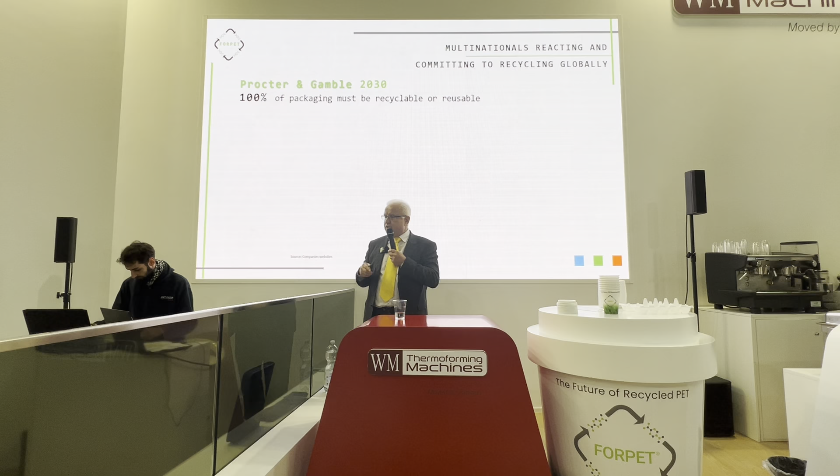This is something we have been really working out, and we have also been trying to follow up on the announcements of the brand owners. If you look at brand owners like Procter & Gamble, they are announcing that by 2030, 100% of their packaging must be recyclable or reusable.

If you look at Starbucks, by 2030, 50% reduced waste sent to landfills, driven by a broader shift toward a circular economy. Pepsi, by 2025, 100% of packaging must be recyclable or biodegradable. Nestle, by 2025, 100% of packaging must be recyclable or reusable.

And finally, McDonald's, by 2025, 100% of McDonald's packaging will come from renewable, recycled, or certified sources.

So this is nothing we have been developing - you can find those announcements on the internet, and this shows that the big brand owners are following a circular stream. We at FORPET would like to give them a chance to fulfill their own commitments. And how we should do this, I would like to present now.

As the name says, FORPET, we're dealing with PET. Why PET? Because PET meets all characteristics of a circular economy. PET is 100% recyclable. It could be recycled many times without any problem. 100% recycling usage is possible.

If you look at the water bottles, I don't know whether this particular one is 100% recycled, but this kind of bottle already exists using 100% recycled PET. So that means PET is already, in certain packagings, in a fully circular stream.

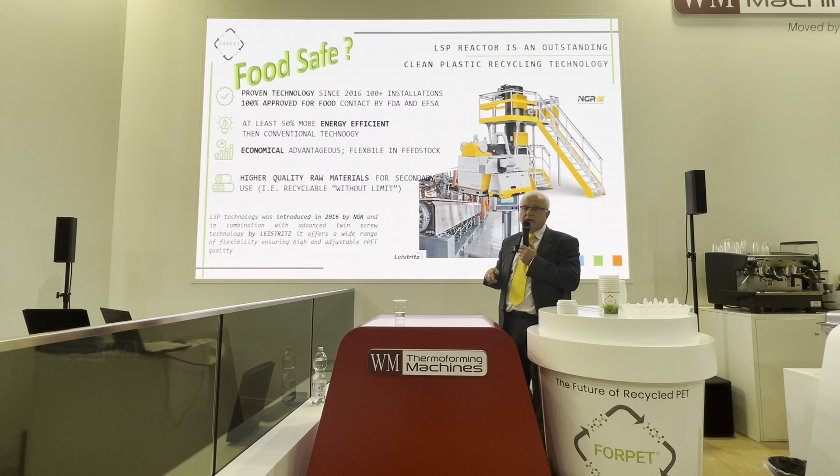At least with this combination, when we are running twin screw extruders with the liquid state polycondensation, we are getting even 50% energy saving. And in times like this, I think everybody is really worrying about energy; energy saving is really a critical point. And this keeps the OPEX in a lower part.

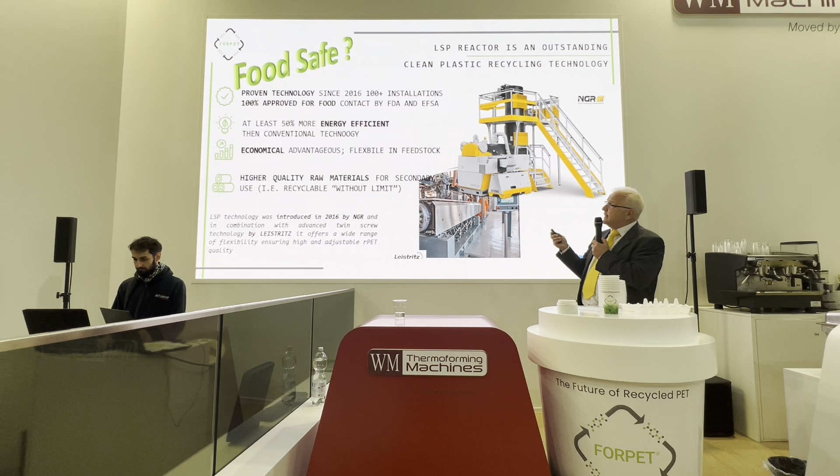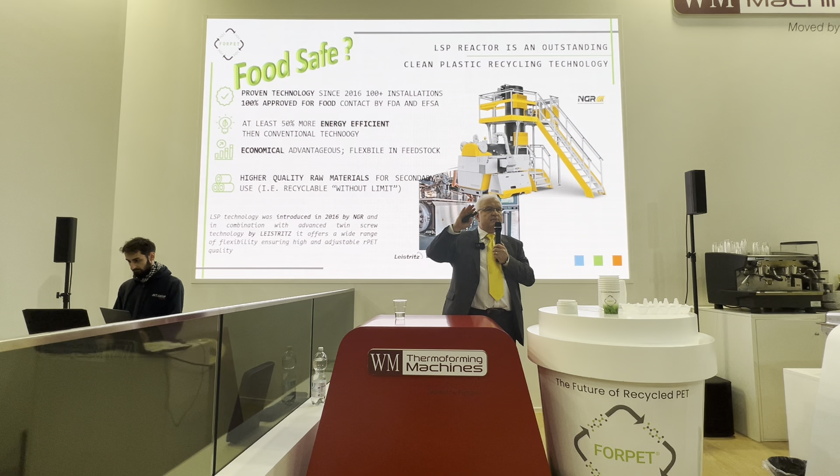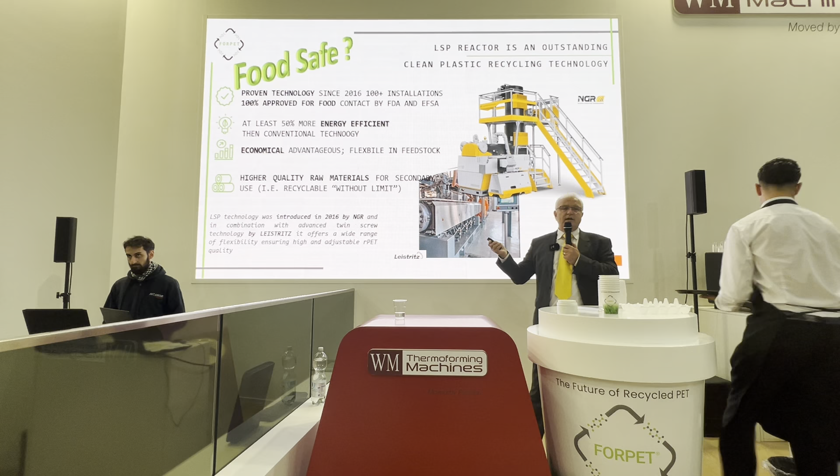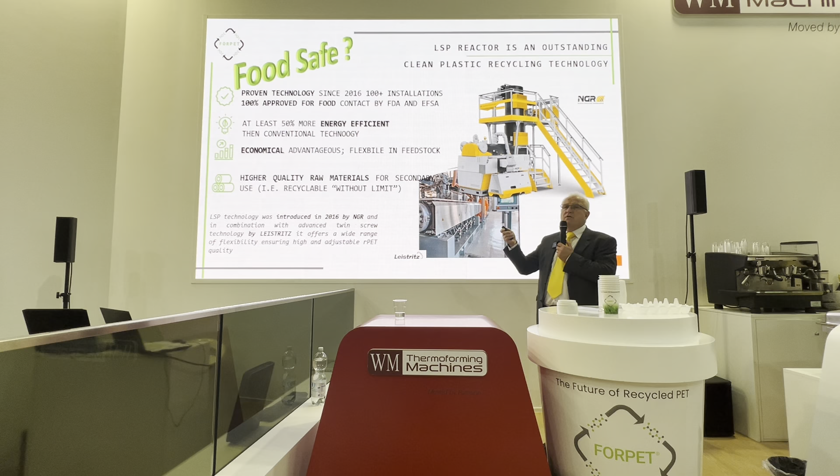And then, of course, with the right extrusion technology, with the right liquid state polycondensation, it gives us the possibility to look for certain feedstocks. So we are not only looking for a very qualified feedstock, because we can handle a wider variety of feedstock with that equipment. And so, without any problem, with a raw material source which could really give you an opportunity, we're able to produce raw materials for second use, especially for second use in packaging.

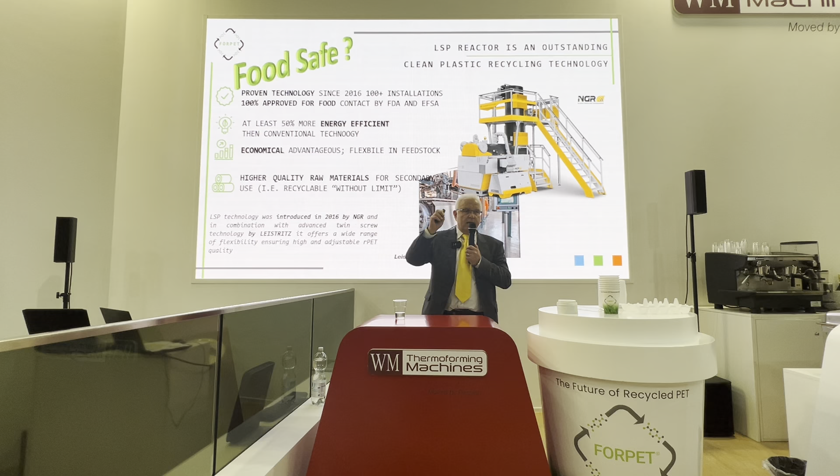In that stage, we are manufacturing granulates, dedicated and approved for food applications according to EFSA and FDA. Well, the technology to turn the pellets into a semi-product, which we then turn into a package at the final stage, is a sheet line. And again, here we are combining the technology of the melt preparation with a very well-known technology in terms of sheet preparation.

So for the final product, why we are also using twin screw extruder technology versus single screw extruder technology is that our packaging has to compete and has to be most cost effective, because our target is not other plastic packaging, it is paper, and paper is cheap. So how can we do it? We're foaming PET. And foaming PET needs, of course, more sophisticated equipment technology-wise. That's why those kinds of equipment and those cooperations give us those possibilities.

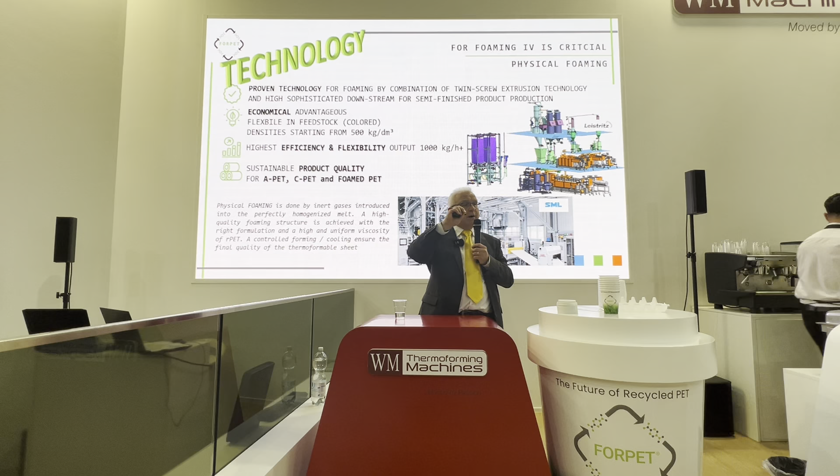And if you're looking at foaming, especially thin sheet foaming, you can imagine that the viscosity of the material should be quite stable. That's why we're introducing the liquid state polycondensation just before, because this gives you the right viscosity together with the melt preparation. So finally, we introduce an inert gas into the melt, which has an equal viscosity, and we transform that melt with the blowing agent into a very thin sheet. And out of this sheet, we're able to make the next step to transform the semi-finished product, the sheet, into a product.

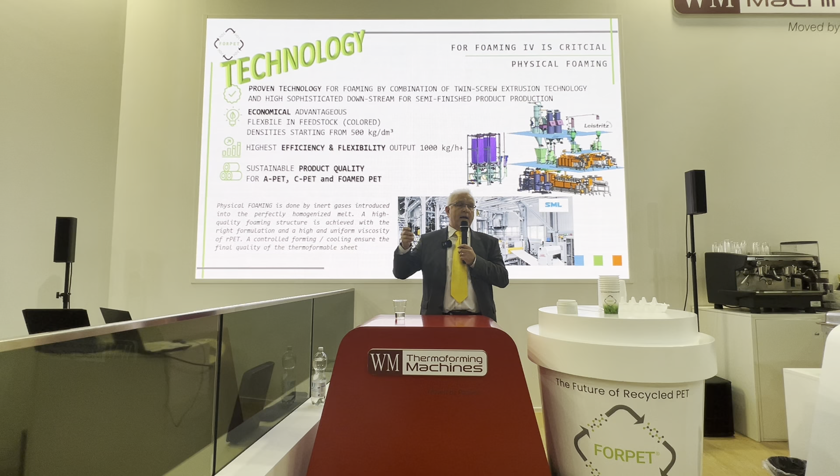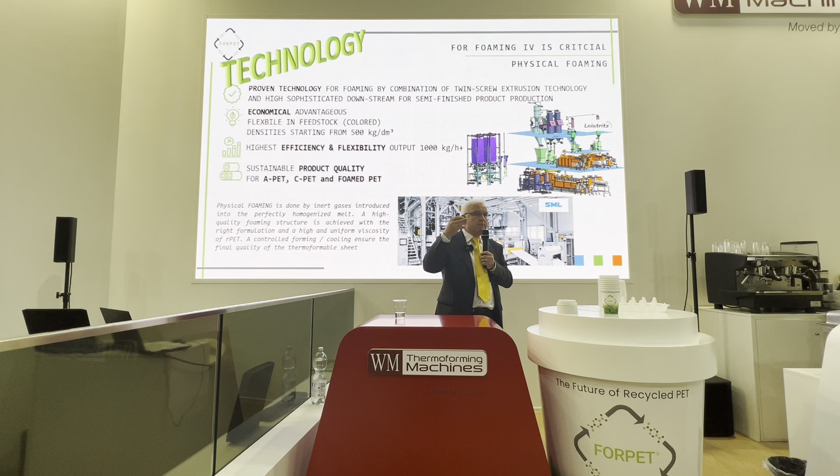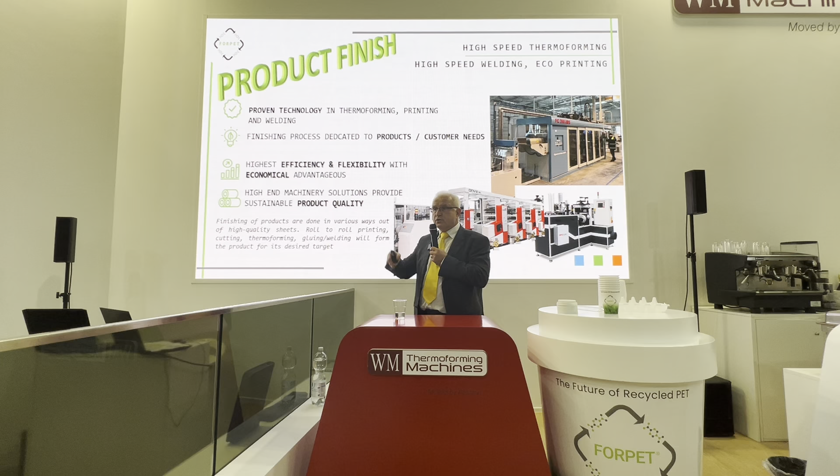A product which could be manufactured either by thermoforming or by other possibilities in terms of gluing, in terms of printing. And this is something we are doing together with wrapping machinery, with WM machinery, when we are turning the sheet into a lid or into a thermoformed product like this one, like the egg shell. However, there are other possibilities as well.

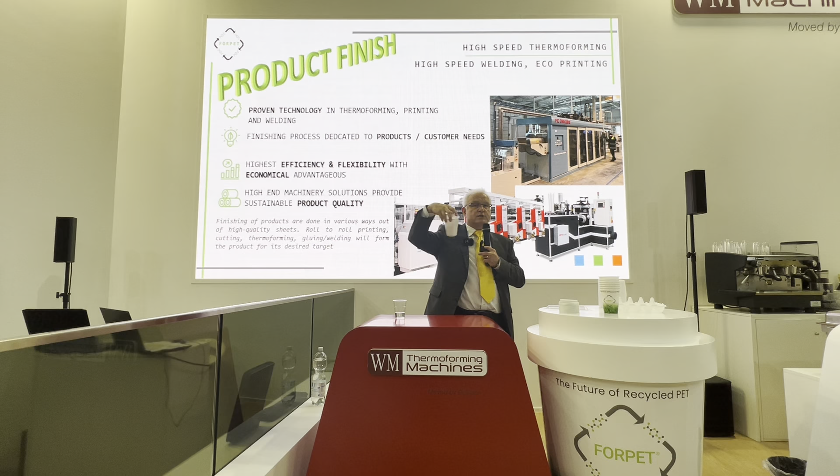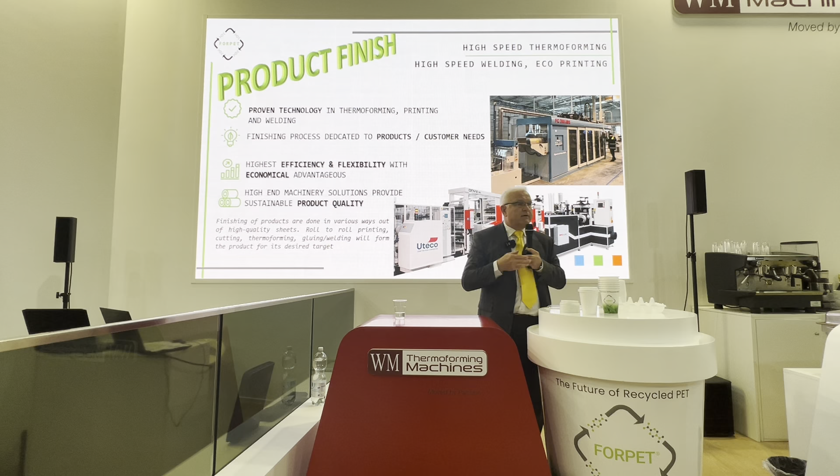If we look, for example, at the cup, and remember, this is our target product, we have to replace paper-made single cups. These are more or less rolled and then glued or welded, and then used with the right lid to form a fine cup. And the good thing here, and I will tell you a little later on, is why we think this is a very ecological solution.

But before I come to the product itself, I would like to announce again: partnership will make it happen. Because there is not a single solution provider capable of doing everything, and partnership, especially on such a complex project, is needed. And that's what we are doing, not only on the production side, as I mentioned, but also on the preparation side of the feedstock, like with Hydrodyne for the washing lines, or with Tomra for the sorting lines, because we have to provide our clients a solution.

Everybody says, well, guys, with those foams, we cannot separate them because they don't pass the swim-sink separation. Well, that's true, because it's lightweight. That's why we are really going for a foam, to make it efficient in terms of the material. But with modern technologies, like the near-infrared sensor, you can detect them and bring them back into the value stream. But this is something you have to explain to the partners so that they follow those ideas.

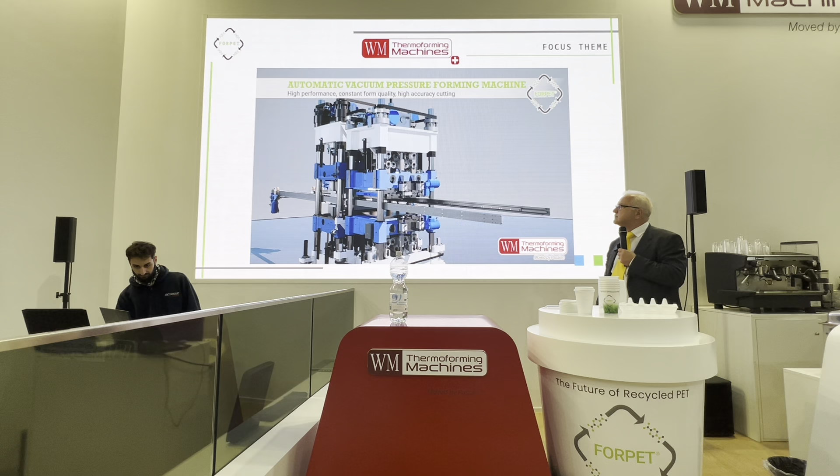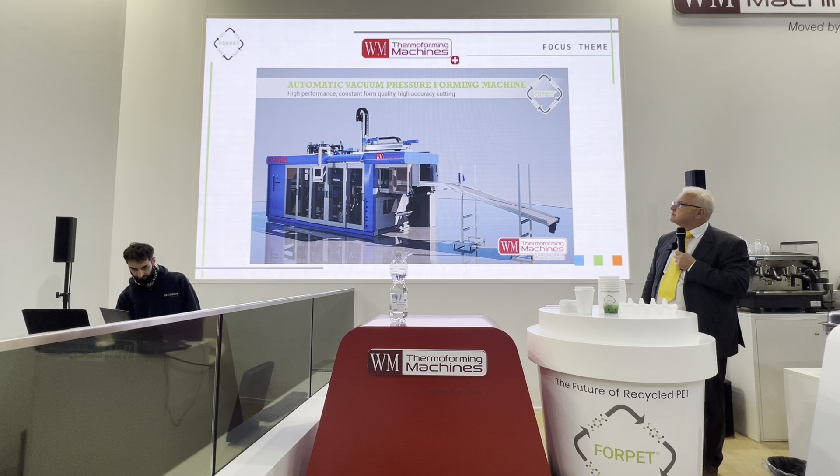FORPET and wrapping machinery's thermoforming machine team up, shaping our finished products. The advantages: lowest energy consumption, highest efficiency, less utilities, lowest OPEX, gentle processing with a perfect final finish. But more to hear from wrapping machinery probably later on.